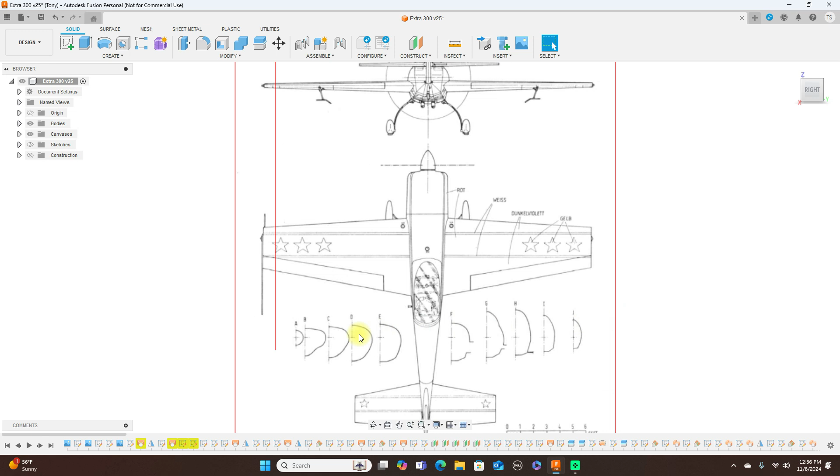Today we're going to be looking at modeling an Extra 300. Now I'm going to show you the way that I modeled this, because I did not use these formers down here. The reason I didn't use these formers is because I've seen a lot of Extra 300 RC airplanes, and a lot of them in the back do not follow this.

For scale, like this, a lot of them are just rounded. So this would just be round here, and this from here be round here also, etc. Even up here. And to be honest, I have not yet seen the cowl up front where it has this shape to it here. I've always seen most of them, or the ones I've seen, they were round. So up here, I've always seen them rounded up here. So I don't know why that is.

A lot of them are not really scale. And if I had to guess, I would say that's because of the TOC, Tournament of Champions, back in the 70s, 80s, 90s, and early 2000s, with 2002 being the last one. They had a rule where you could change so much percentage of the plane. And I'm pretty sure they probably changed the stuff to make the planes easier to build and design.

So small little changes. But anyway, I'm going to show you how I did this, and I consider it pretty easy to do. It's not as time consuming as tracing these formers and then lofting them, and what I'm going to show you here. So let's go ahead and get started on it.

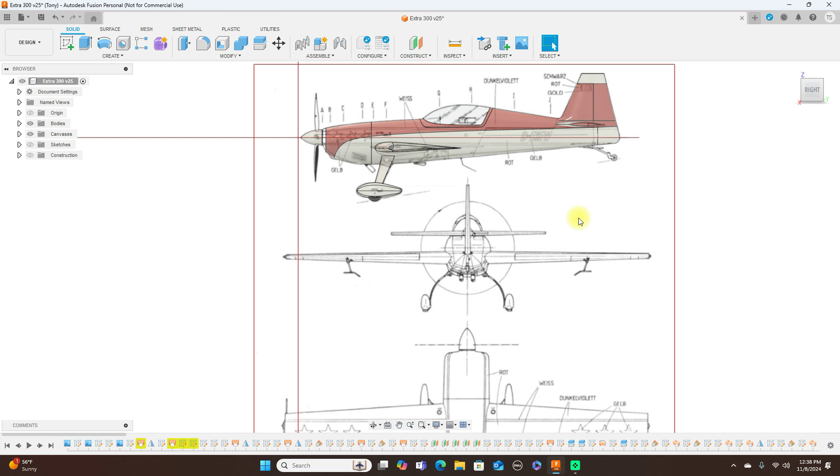Okay, we turn the bodies off here. Well, first let's take a look at this without. But this is what I've done, and this is all surface modeled.

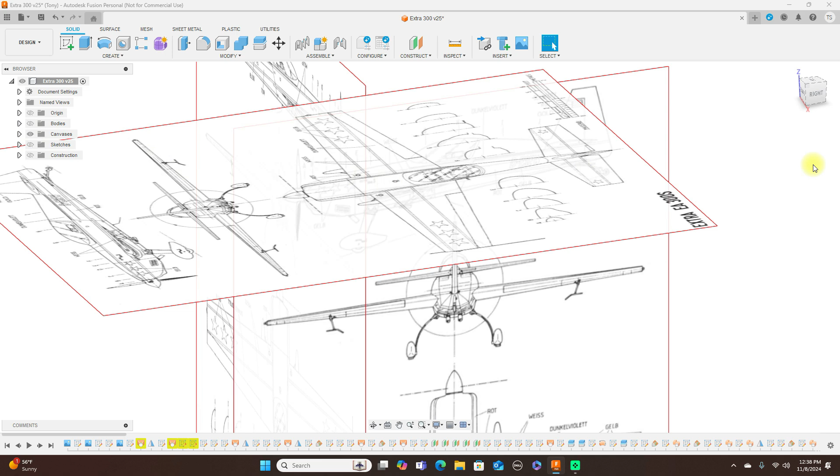Okay, now let's go ahead and get started here. Turn the origin back on and the bodies. First of all, get your pictures lined up in here. Then we're going to create a sketch on this plane here. And let's turn all these other sketches off because we don't need them. A lot of sketches. And like I said in previous videos, what you should do is get in the habit of labeling everything, all your sketches too. But sometimes I do and sometimes I don't.

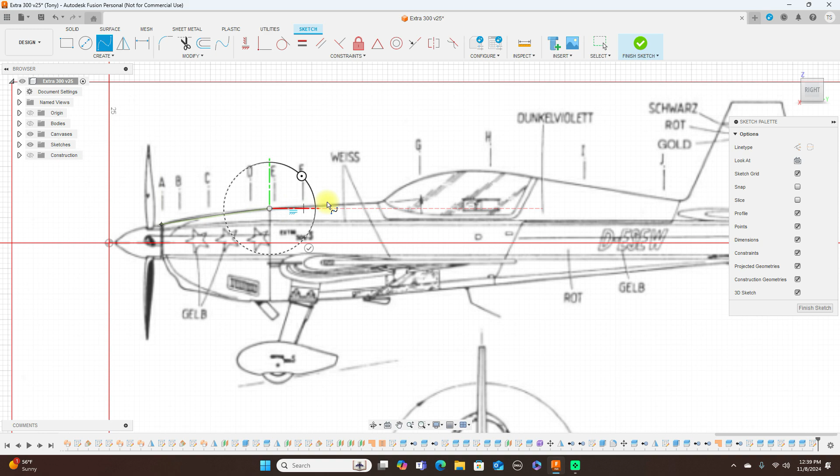Okay, here we go. I'm going to take a fit point spline. Now I've always said to use as few points as possible, and that's what you should do. But sometimes I use more, and when I use more, that's only for speed.

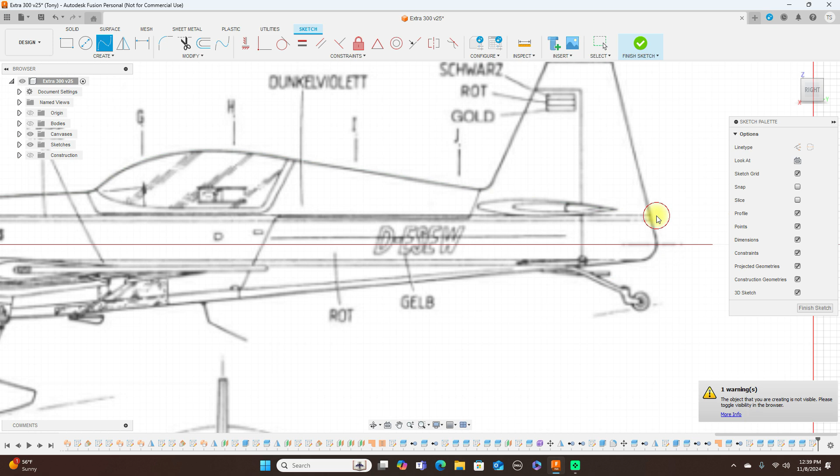Turn that on. Okay. Now we'll go back and match this up as close as possible. And that looks pretty good already.

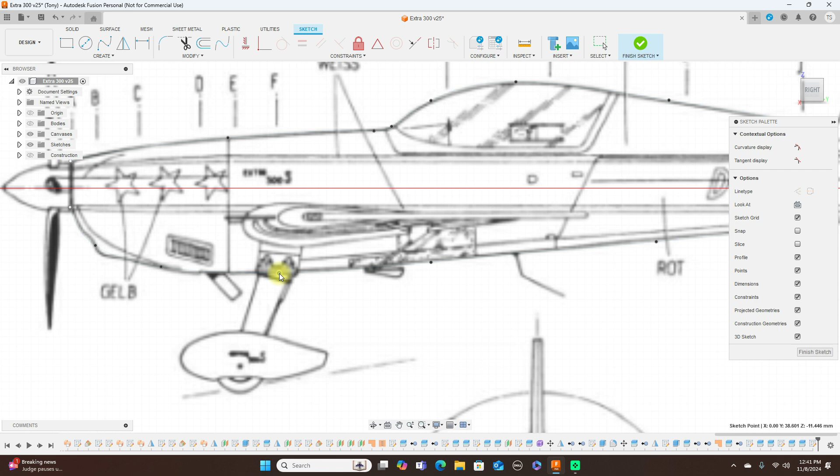Then we're going to do the same for the bottom one, and we're going to follow this down through here. And we'll look at this curve here. Okay, and that looks pretty good too. And we have our two lines there.

Turn the origin on. Now we're going to create a sketch on this. And create sketch. And now I'm going to follow this.

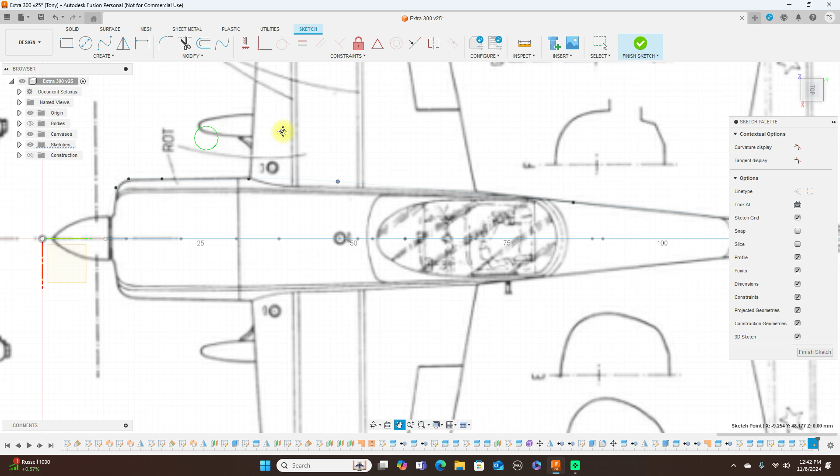Okay, and that looks pretty good. Just move this down a little. And use this handle here to move this out a little. There we go.

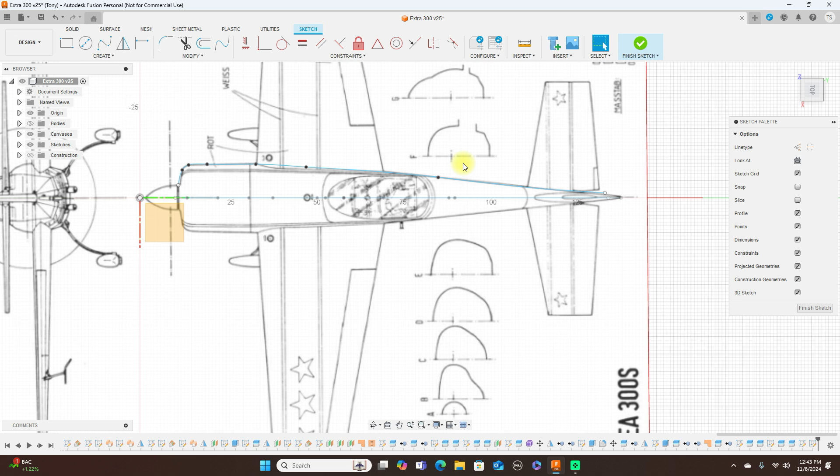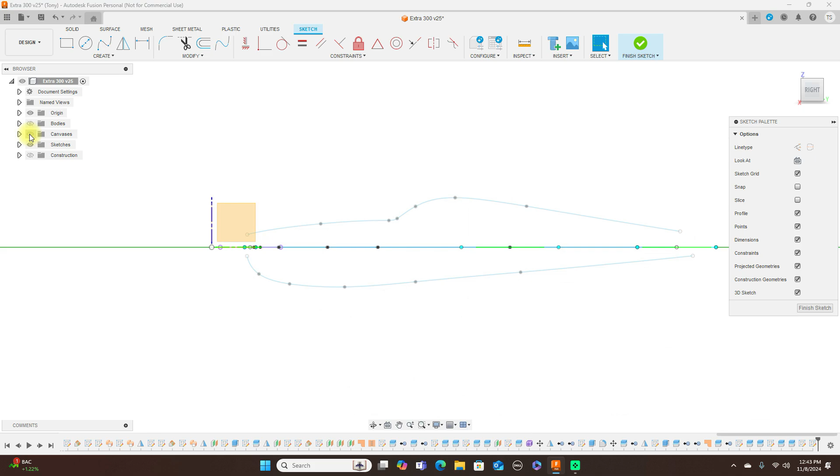Then I'm going to mirror that line to the other side. And click OK. And this is our, finish the sketch here. And here we have so far.

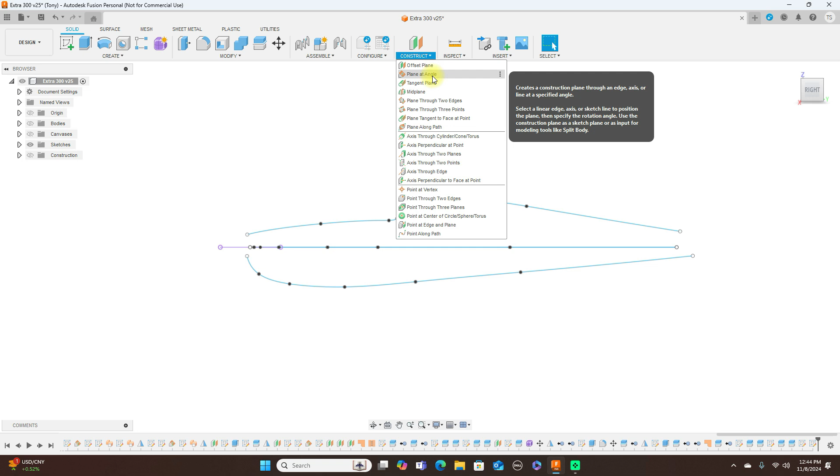Okay, now what we're going to do is put some offset planes in here. Select this. And as you can see, these are offset planes that I put in here already.

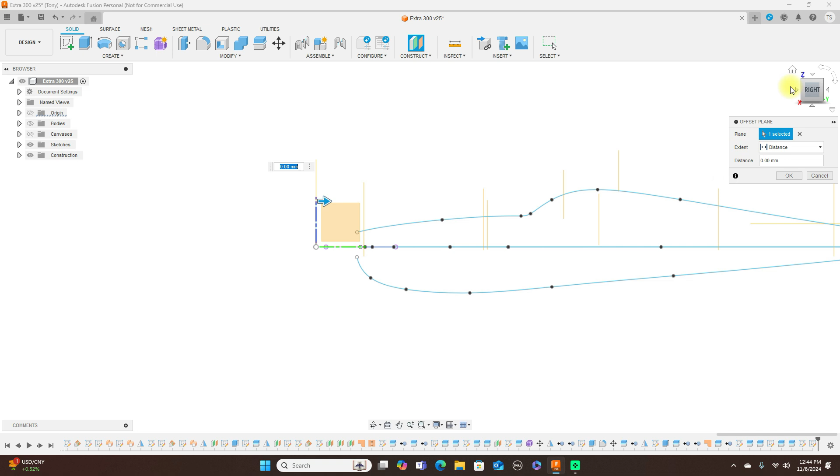Now the planes that I want to keep, I'm going to turn some of these off because I don't need them all. Leave that one. This one don't need. Leave that one. That one in the back. The one in front. That one we don't need. Okay, here are the planes I'm going to use.

Going to label this plane 1, or just P1. This one, P2. P3.

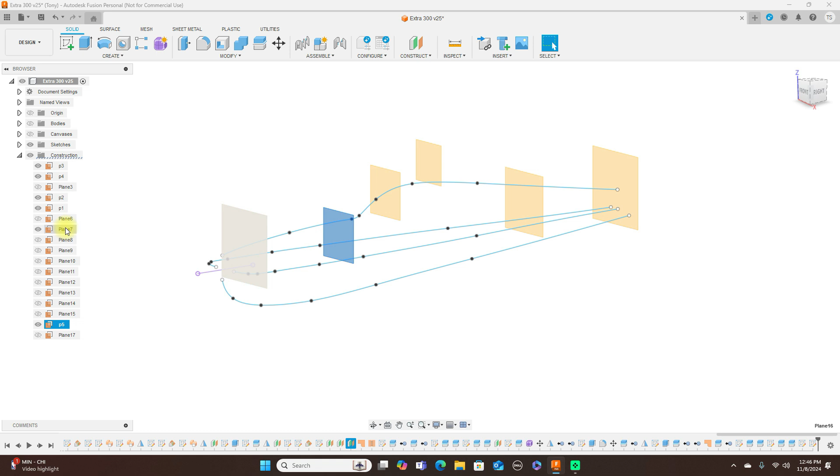And I'm going to turn these off. 1, 2, 3, 4, and 5. And leave 6 on.

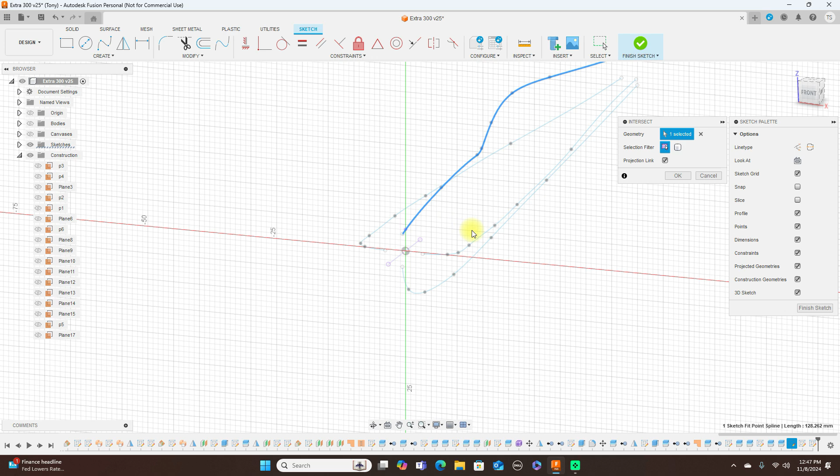Create a sketch on this plane here. Come up here to create, project, include, and intersect. The geometry you're going to select are these 4 lines. Click OK.

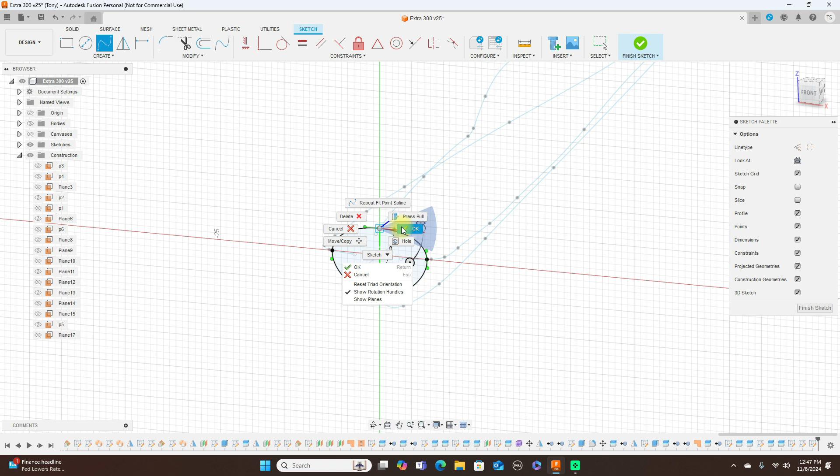Next, select Fit Point Spline. Snap it there. And finish that sketch.

Now look at these sketches. Turn this one off here, because we don't need it right now. And now turn on P5.

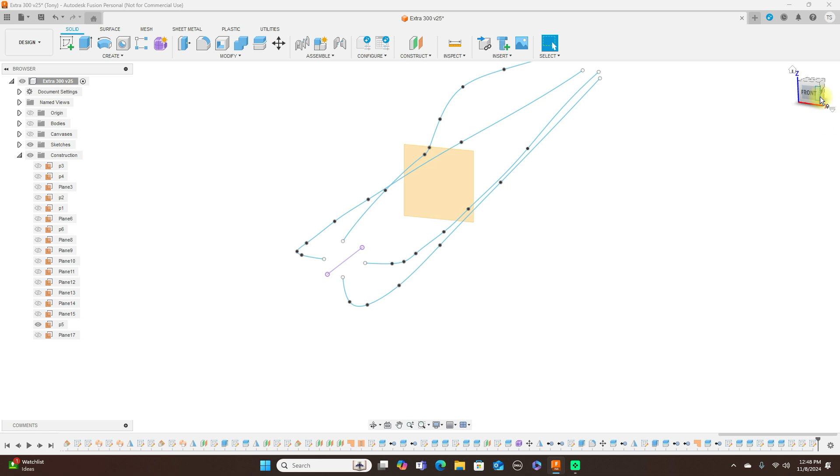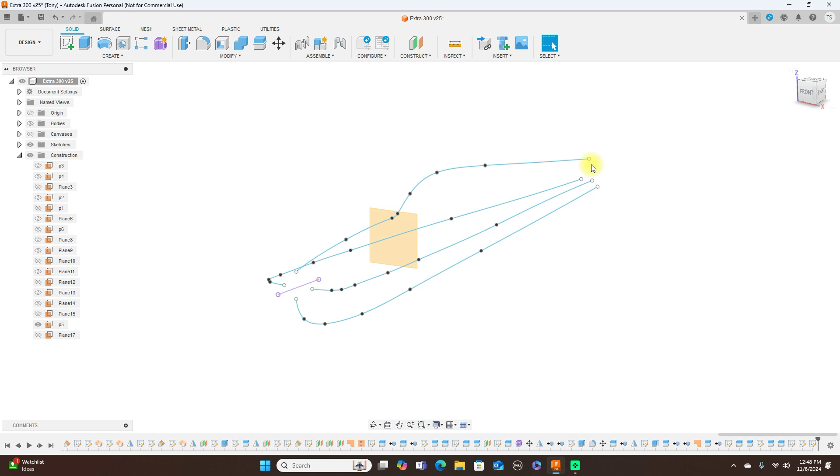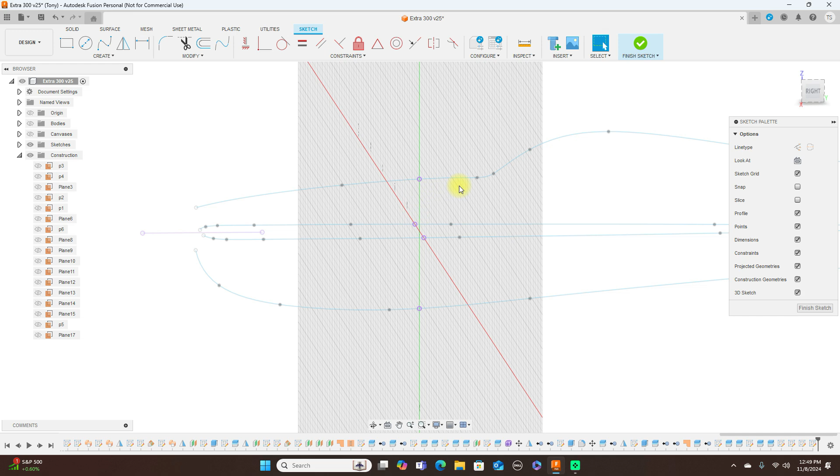Again, create sketch, project, include, and select intersect. The geometry again is these 4 lines here, 4 sketches. If you don't know what this is doing when I select that intersect, it's putting the points - this plane through here is putting the plane on these points, or the points onto the plane itself.

So now we can snap a spline to each one of these points on the plane.

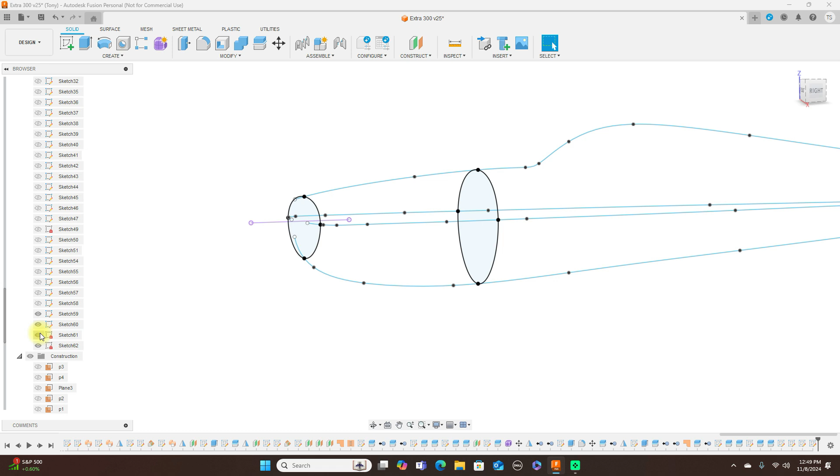Okay. Now you can see we have those 2 there. Turn those off. Turn this on here.

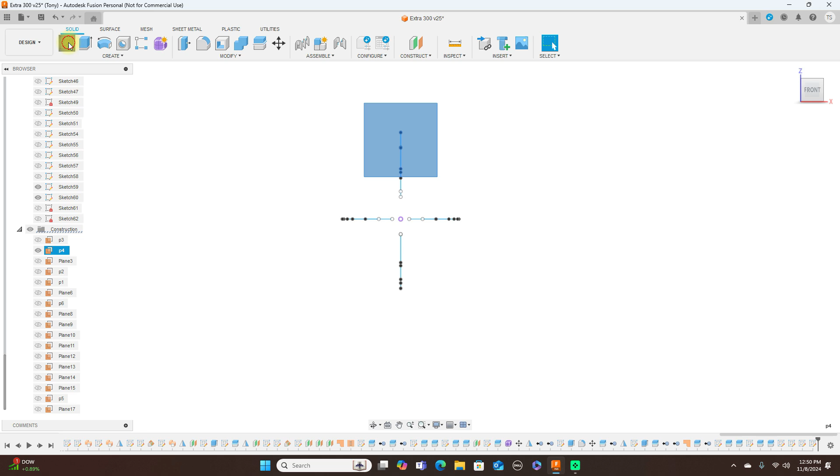Create a sketch on this plane. Once again, create, project, include, intersect. And we select the geometry. Click OK.

Now, this particular way of surface modeling works really well in matching the shape to a particular model that has a roundish sort of fuselage.

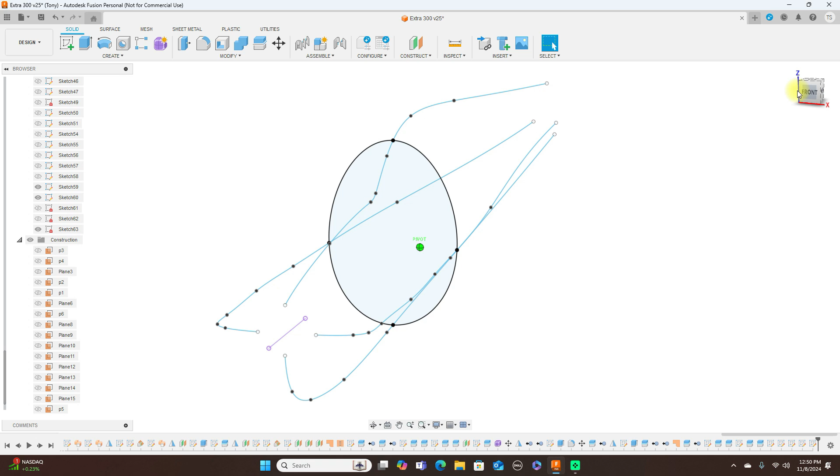I have those 3 there.

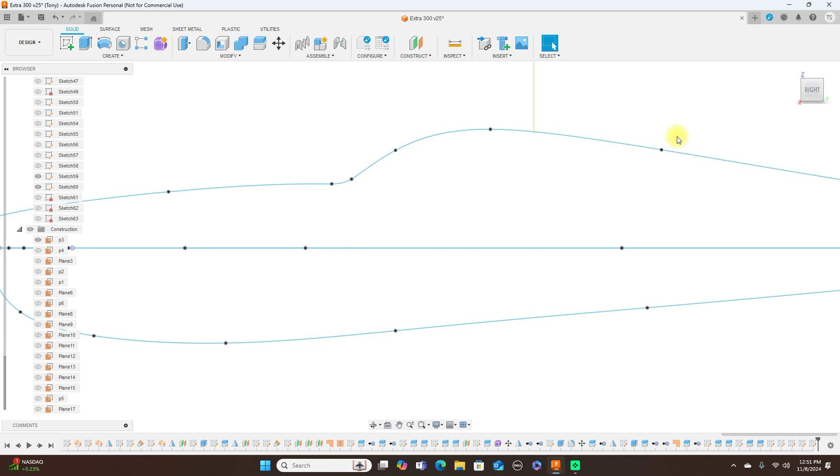And we're going to do the same thing again. Create a sketch on this plane. Create, project, include, intersect.

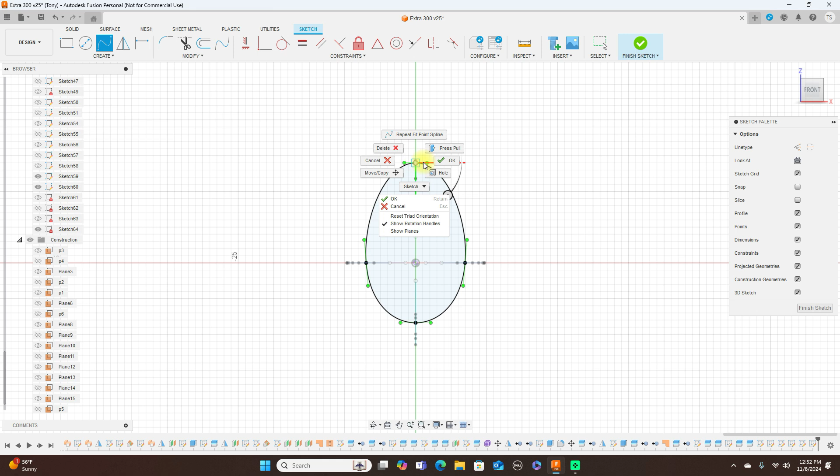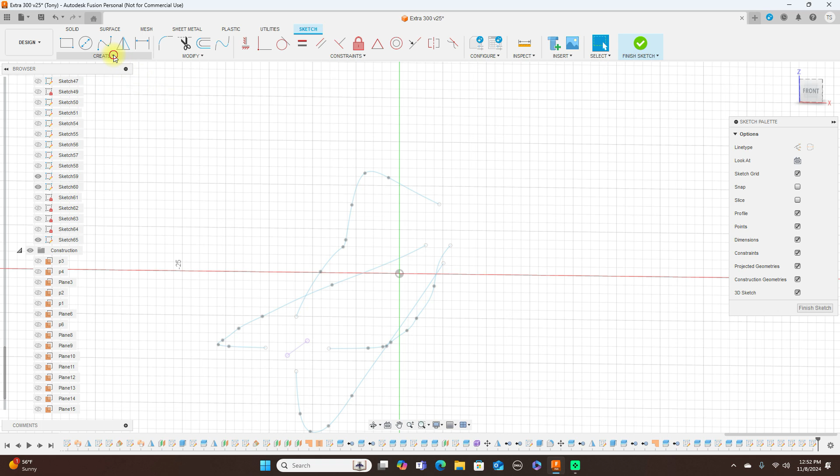There's that one. And repeat the process. Create, project, include, intersect, select the geometry. Fit point spline.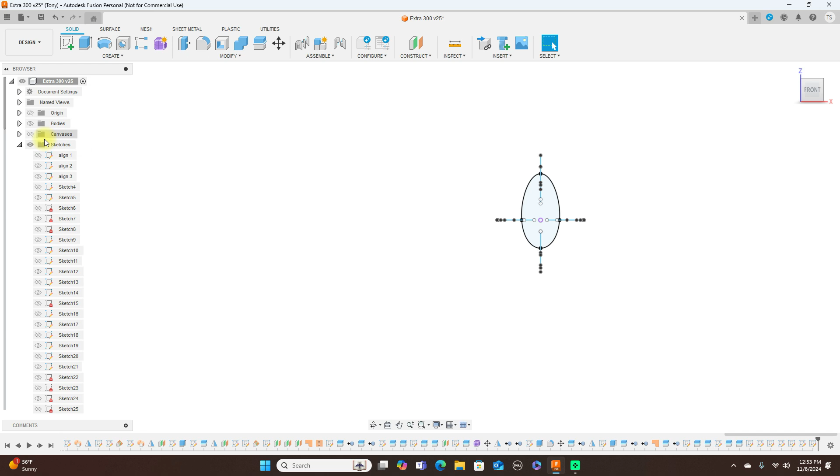Now what you can do also is turn the canvases back on here. These shapes in the back here - this is backwards, but these shapes here - instead of snapping a point here to here, you could snap a point here, then snap a third point here, and then snap here. Then you can adjust this to match this shape here if you want to do that.

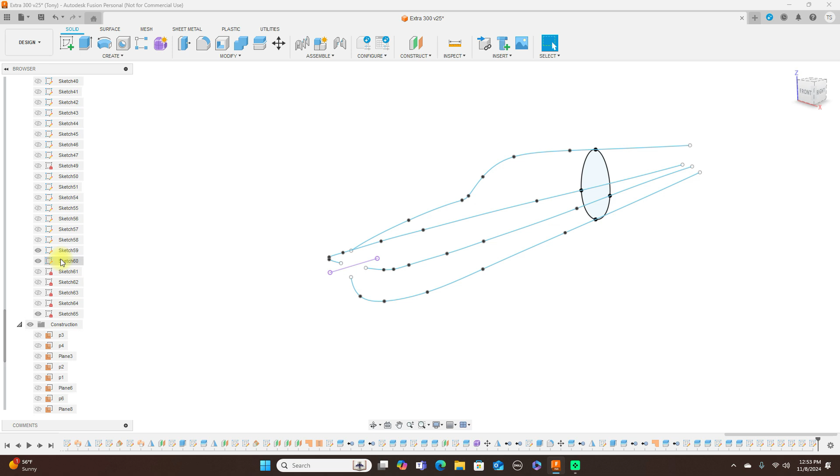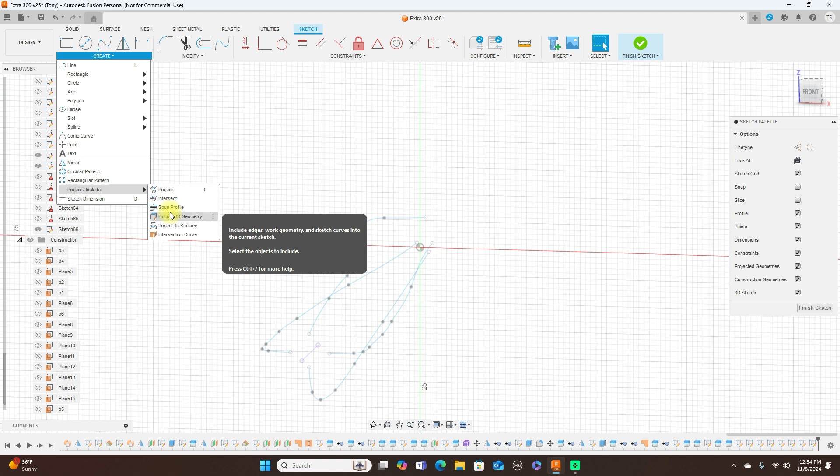Okay. And this should be the last one here. Include 3D geometry again. Fit point spline.

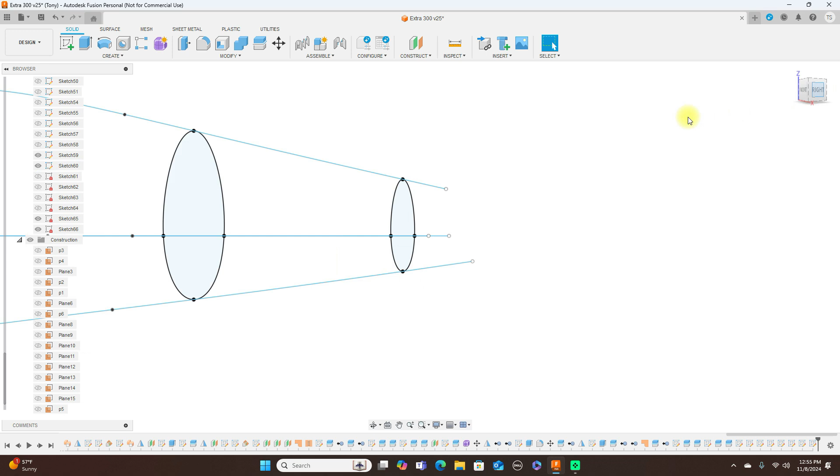All right. This is what we have.

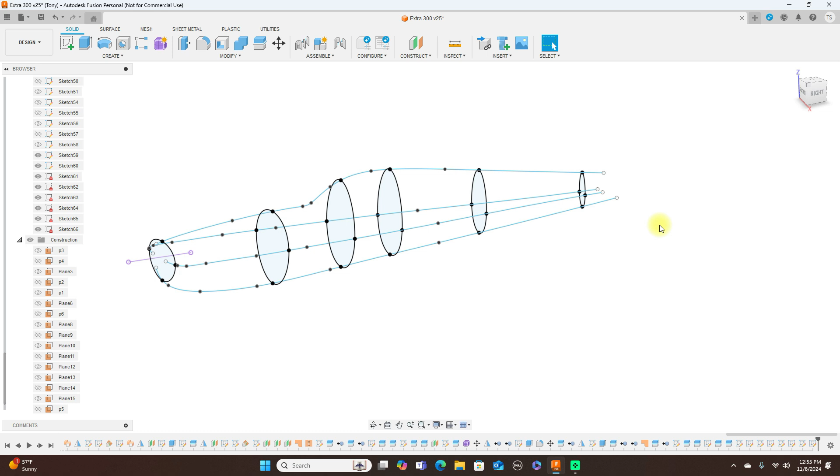So now we come up here and change this to surface. You could use a solid to loft these, but I like to use a surface. Make sure this is zeroed out. Then select each one of these profiles.

And we want to select the rail, so click this plus here. Our rails are going to be these. And click OK.

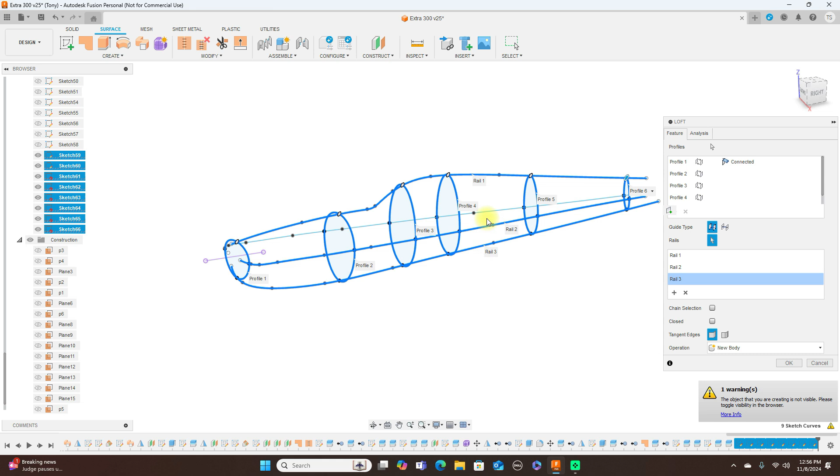Now we come up here and turn the bodies back on. And what we need to do here is turn off the previous stuff. So turn all this other stuff off, so we just have what we just did.

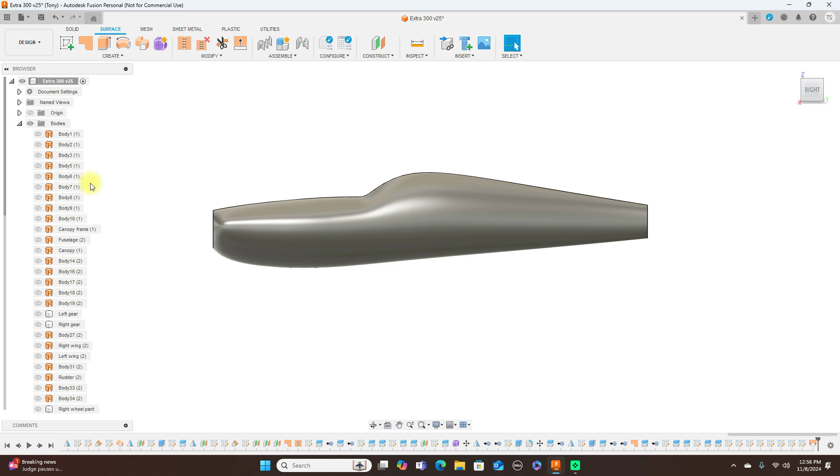Okay. And that's our shape that we need. And it's really good - it matches it up perfectly.

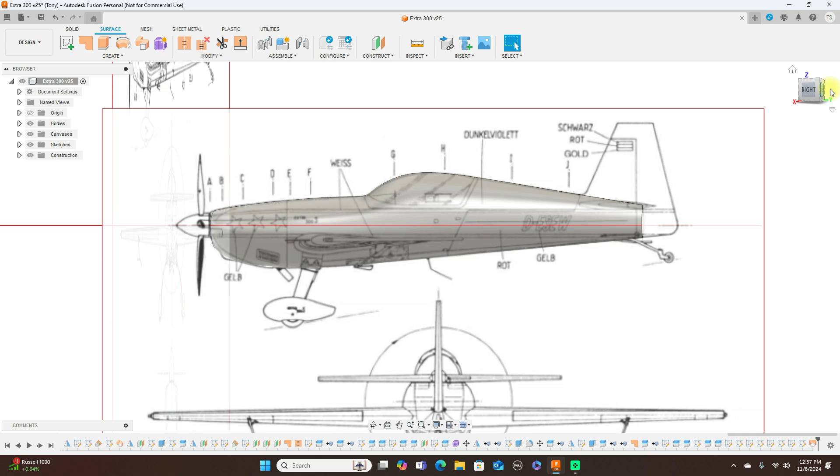And we can get a little more detail, but first we'll just model this back here. Turn this fuselage off.

Okay, and to do that, we create a sketch on this plane here. Draw a line from here to there. Click OK.

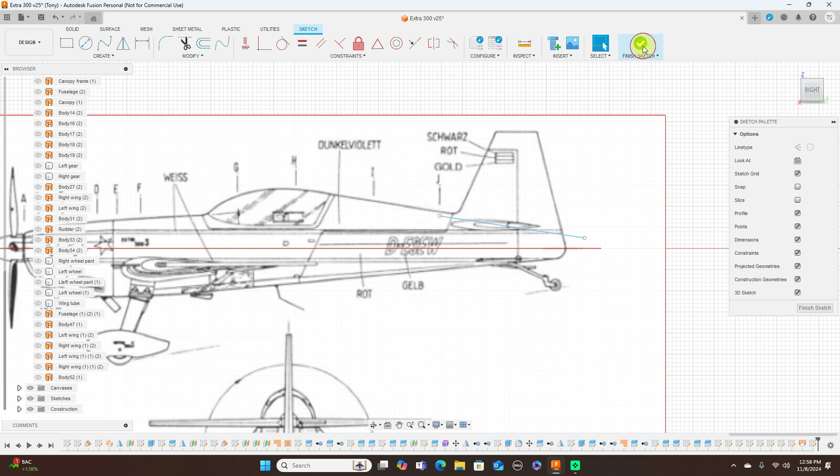And finish sketch. Construct plane at angle. We're going to use this line here. Change this to 90 degrees. And click OK.

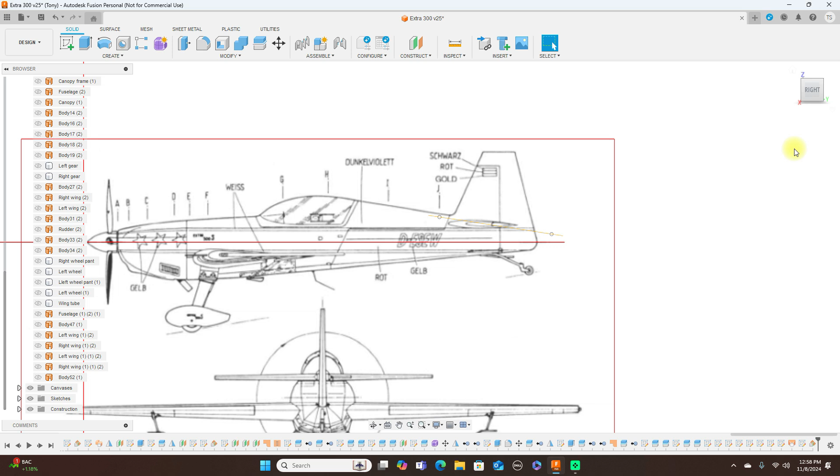We're going to create a sketch on this plane here. I'm just going to move this down a little. Turn that last sketch back on.

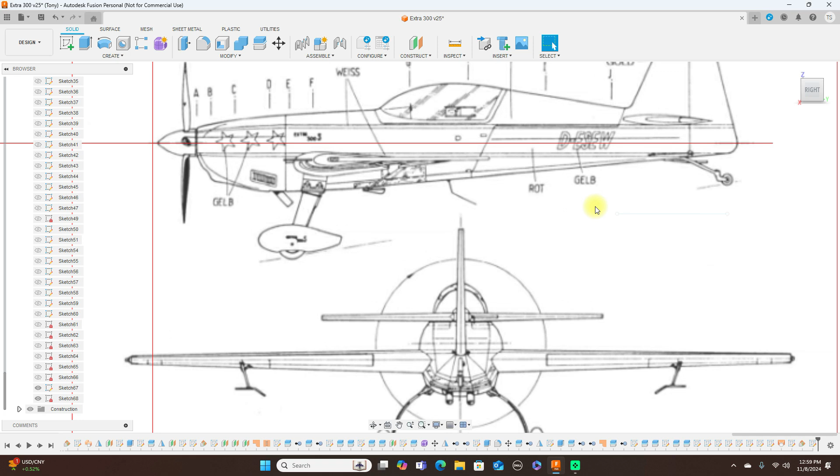Okay. I don't know why this line is down here, but no problems. Okay, this is wrong - looks like the line moved on me because it wasn't constrained.

So we'll do that again. And do another plane at an angle. Click OK.

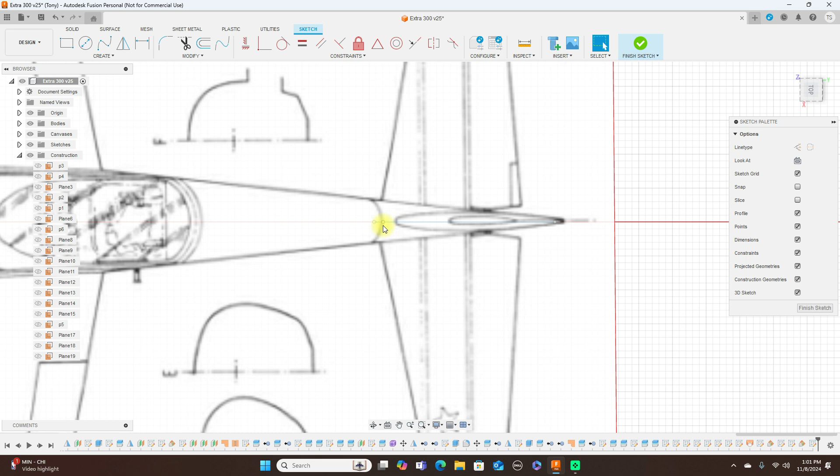And I'm doing an arbitrary airfoil here, like I said in my other videos. If you have a picture of an airfoil that you want to use, go ahead and use that.

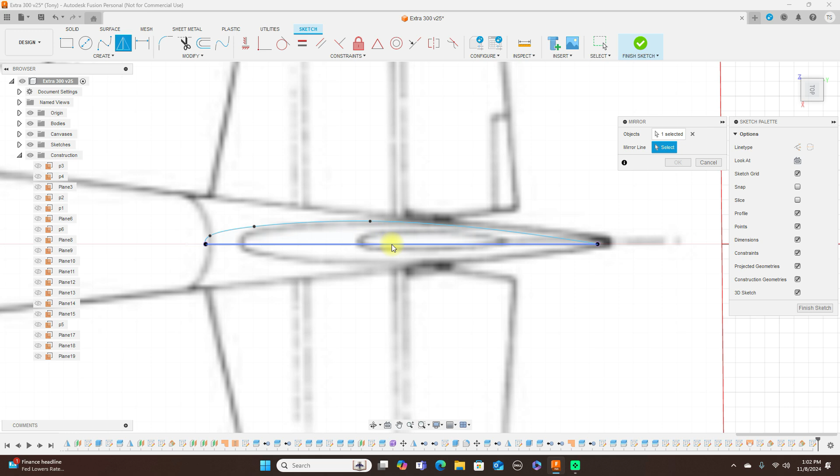Okay, and I'm going to project this line here. Now we have close there, and I'm going to mirror this line here.

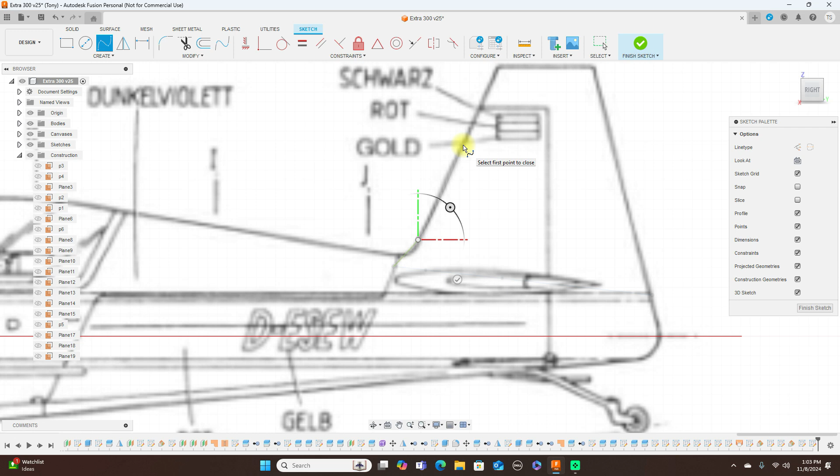Now to create a sketch on this plane here, and select the fit point spline. Snap it there. And I'm going to use a line here. Finish sketch.

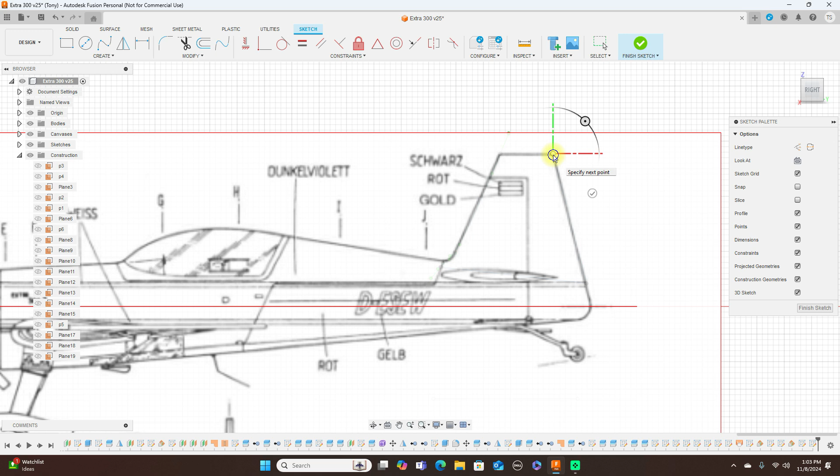And we're going to use a sweep. Change this to path and guide rail. Change this to full extents. And the profile, this and this. Path is this. Guide rail is this. Click OK.

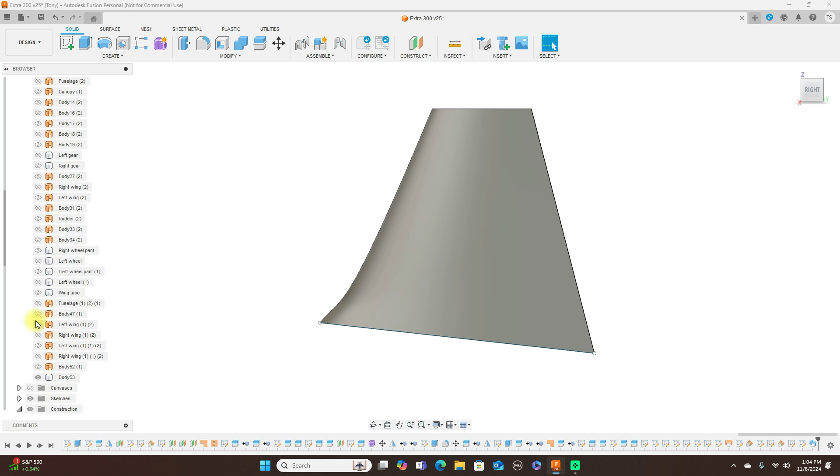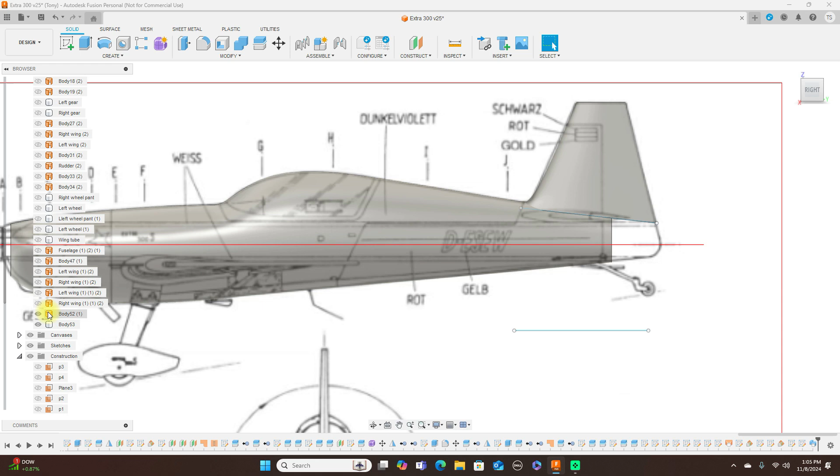And turn that body back on. And we have that so far. And it looks like an extra to me so far. All right, turn this off too. We don't need it.

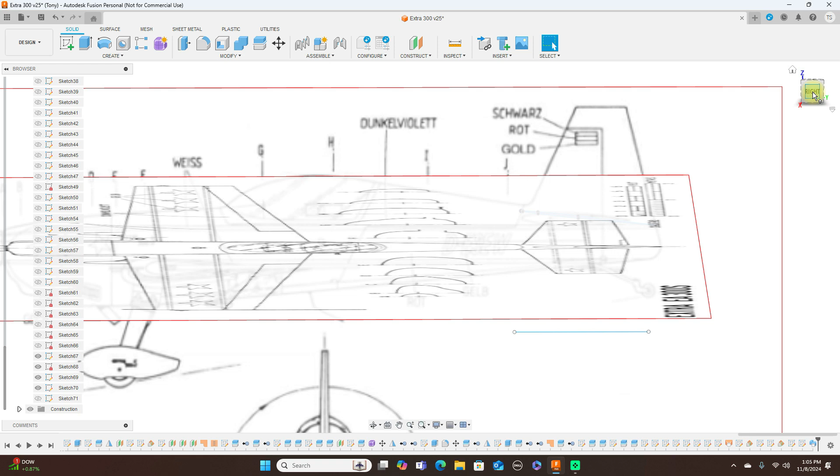Now what we're going to do is just make the bottom half of this. And to do that, it's pretty simple too. Going to create a sketch on this plane here. So we click create sketch on this plane. Use a fit point spline. Snap it there.

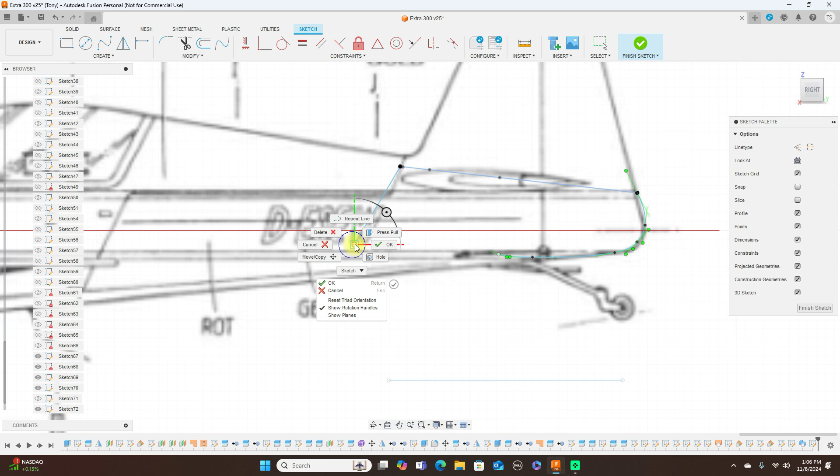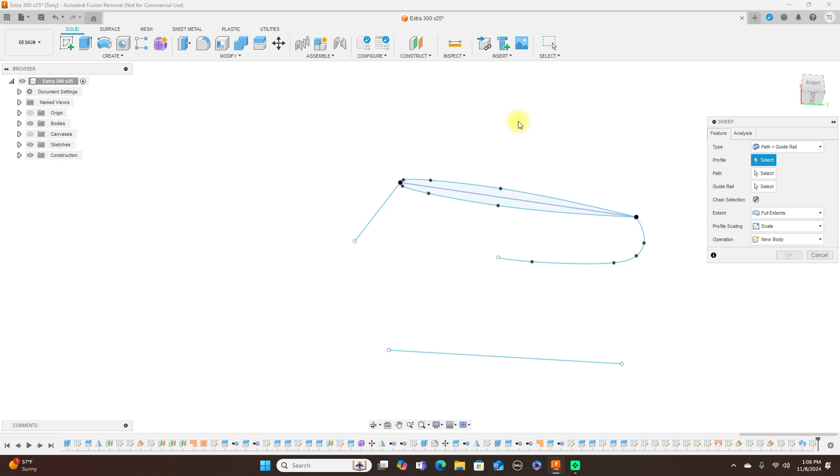It's a line. Click OK. Finish sketch. And we're going to use the sweep again. Click OK. And that's what we have so far.

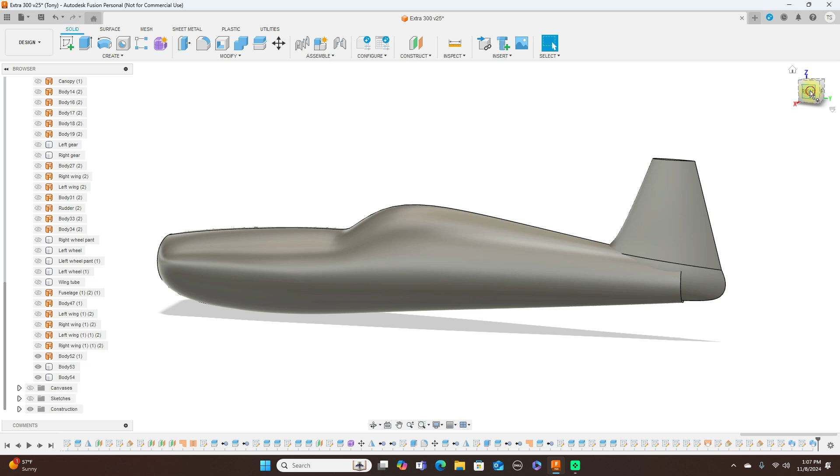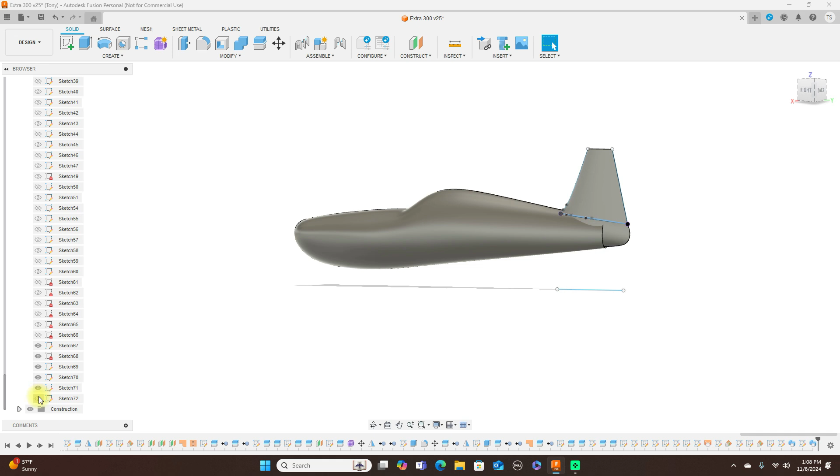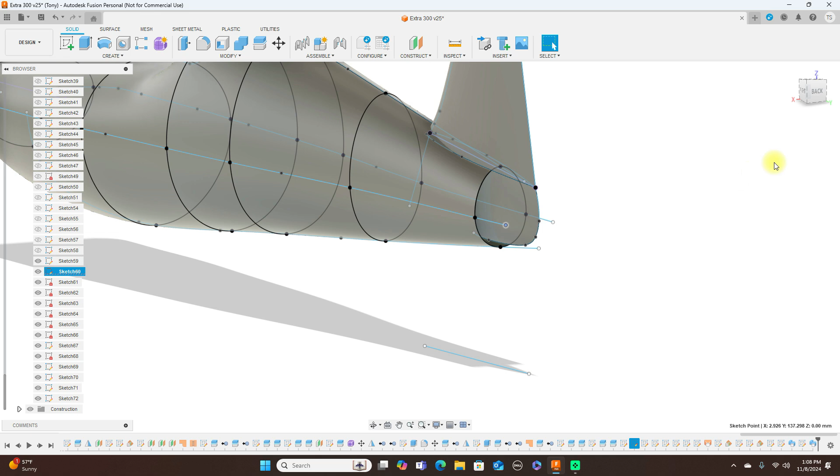Now what you want to do, if you want to go back to your sketches, you can move this in a little. Close this up and open it up a little more. So just mess around with this until you get it to where you like it.

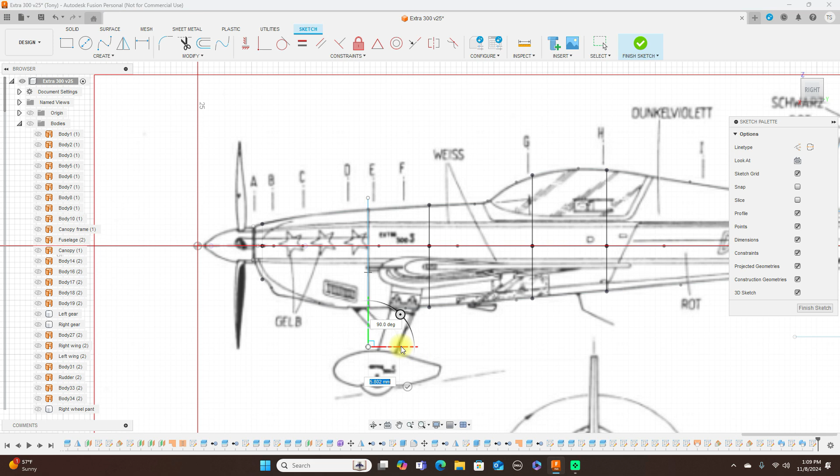Okay, create a sketch. We want to undo this here. Click this. Create a sketch on this plane here. Draw a line from here to here. Turn these off, we don't need them right now.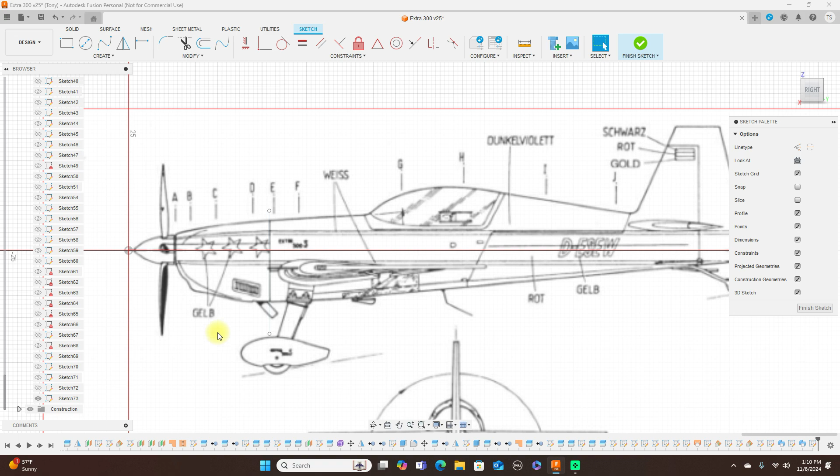Use a fit point spline. And you guys just keep playing around with these until you get it to the shape that you want it to be.

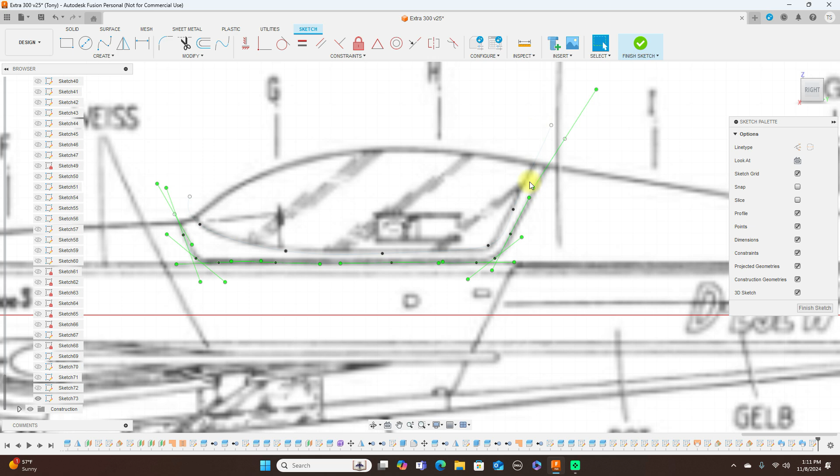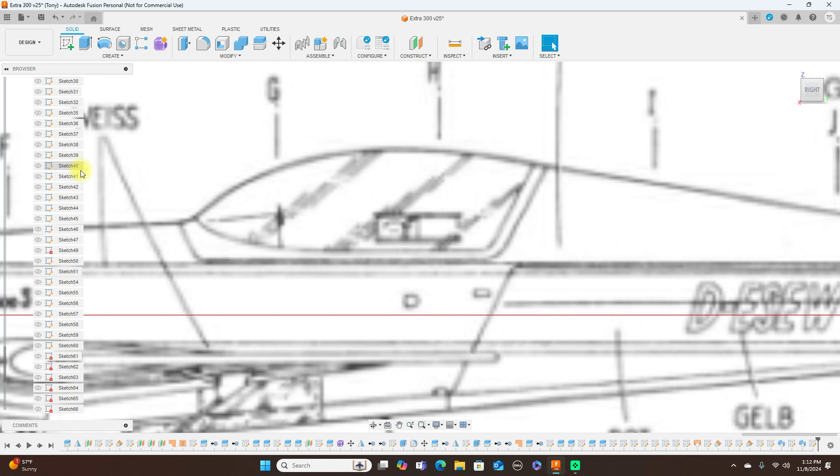Finish sketch. And turn the bodies back on. Turn the sketches back on.

Then we're going to split body. This is the body to split. This is our splitting tool. Click OK. Do that once more. We'll turn the sketches back on. That last one turned off.

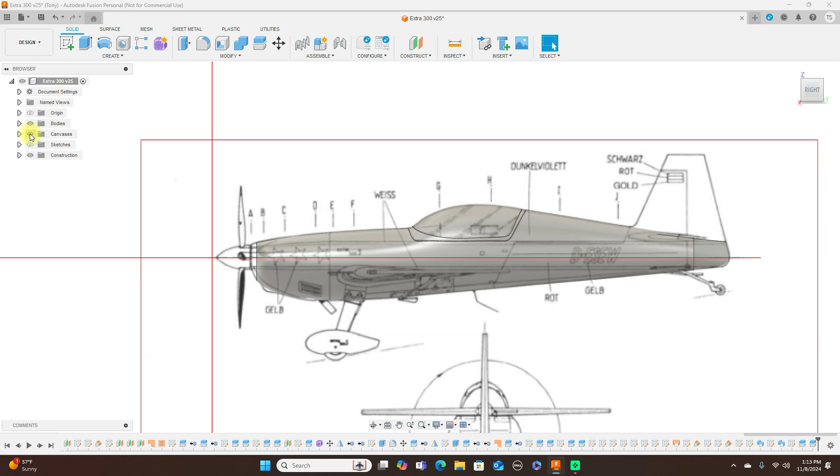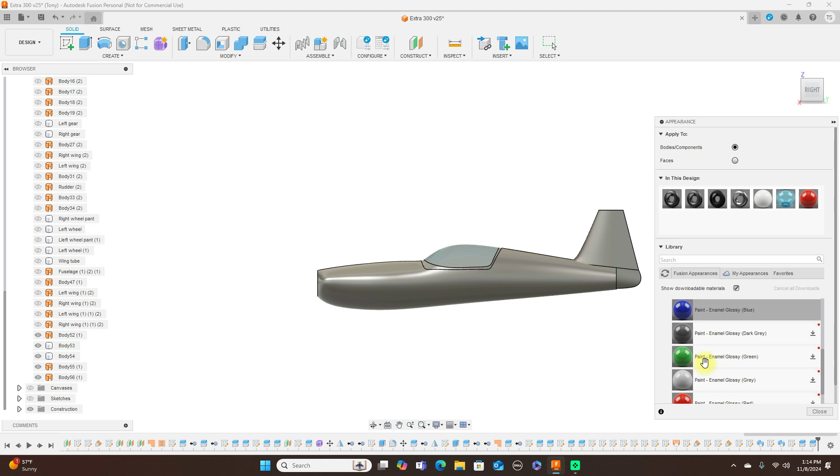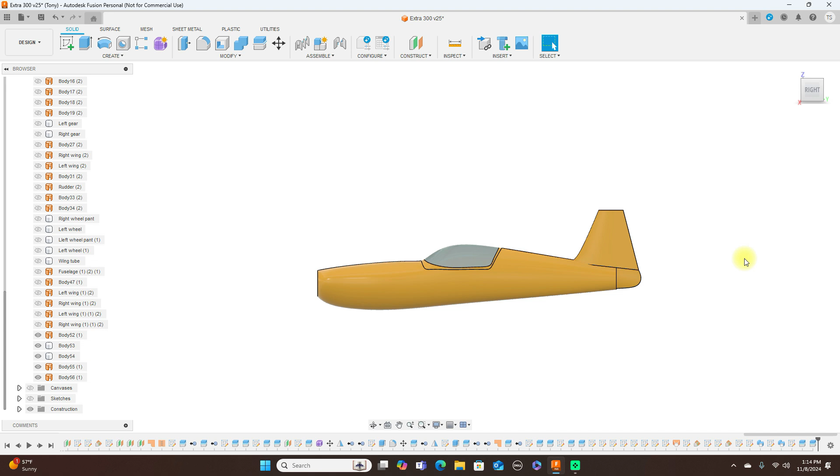Split body. This is the body to split. Okay, that's what we have so far. Okay, and here's our extra so far.

And next, just show you real quick how to do the spinner. And then I'll do another video on this. It should be posted in a couple days to show you guys how to do the wings and the stab, and how to do the wheel pants and the landing gear. So, all right, and finish this front too.

The spinner, just to do the spinner, create a sketch on this plane. And since it's completely round, what we do here is a line from here about halfway. And then you'll use a fit point spline and match the curve of this.

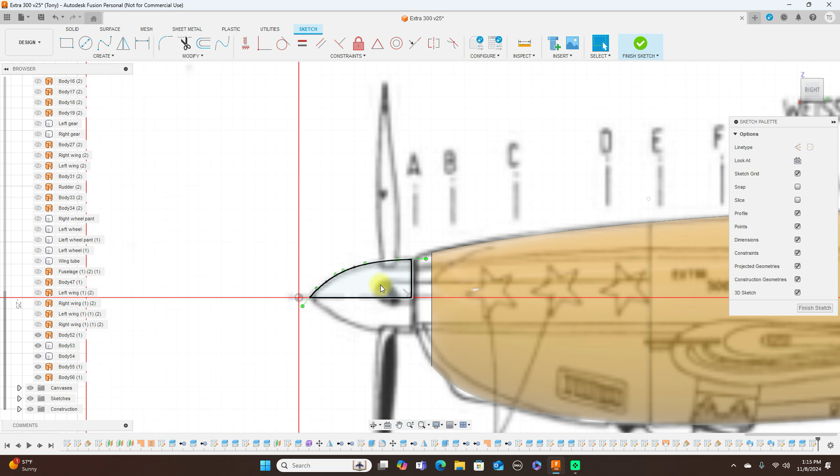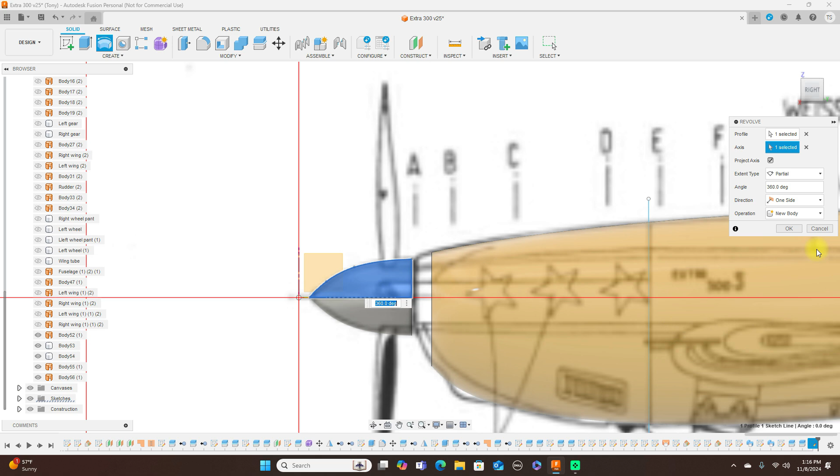Then we have our profile of it. Finish sketch. Turn the sketches back on. Then I'm going to use the surface revolve, and then I'll use the solid, doesn't matter. Then use revolve. This is selected already. Then you select your axis as this and click OK. And there you have the spinner.

And there's our extra so far. All right.

So that's it for this video of this extra so far, what we've done. And when I come to it next, it'll be in a couple days. I'll show you guys how to do the landing gear and the wings and the stab back here, and finish up this front here also. So that's going to do it for this video.